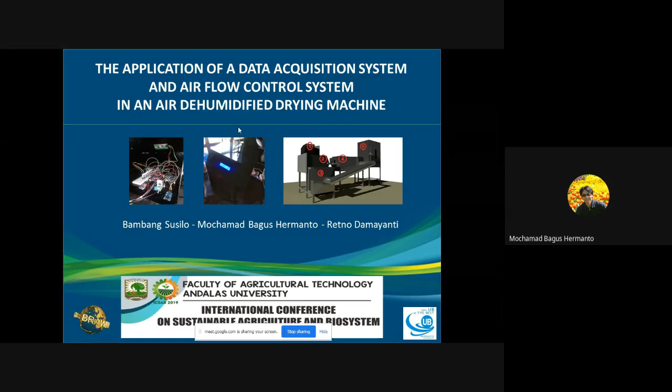I would like to present our article entitled "The Application of Data Acquisition System and Airflow Control System in an Air Dehumidified Drying Machine." I am Mochamad Bagus Hermanto.

The objective of this drying is to reduce grain respiration by removal of excess moisture, so we need to reduce the moisture content and prevent the qualitative deterioration of seeds in storage.

Because excess moisture can support the growth of microorganisms and activities of insects, a suitable design for seed drying system is an important step to produce high quality agricultural seed.

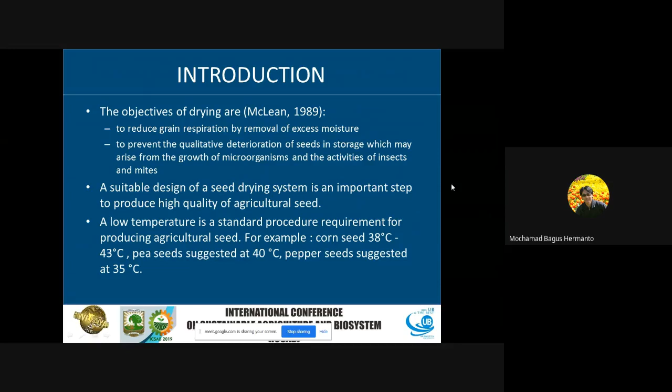For agricultural seed production, for example corn seed, they use 38 to 43 degrees Celsius for drying its seeds. For example, pepper is suggested at 35 degrees Celsius.

The previous research by Susilo et al. in 2020 did a research about the performance of drying machine with air dehumidifying process for sweet corn seed.

This method reduces the air moisture content so that the drying temperature for seed can be lowered with low relative humidity, so the drying rate will be accelerated.

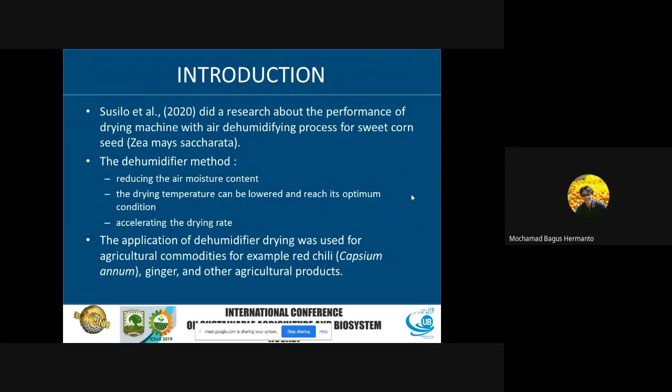Some problems that need to be solved from the previous research: first, the drying capacity of the machine was less than 1 kilogram. We want to increase the drying capacity by modifying the existing drying machine.

Also, the heat from the condenser is not yet utilized. The third problem is that a data acquisition system was needed to collect real-time temperature and humidity profiles during the drying process, and also an airflow control system for ensuring that the humidifying temperature was under the dew point temperature.

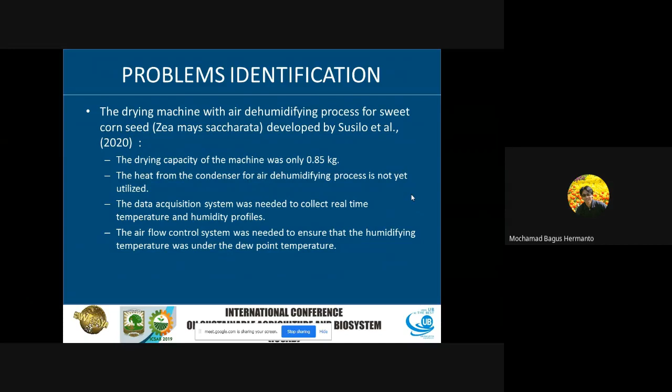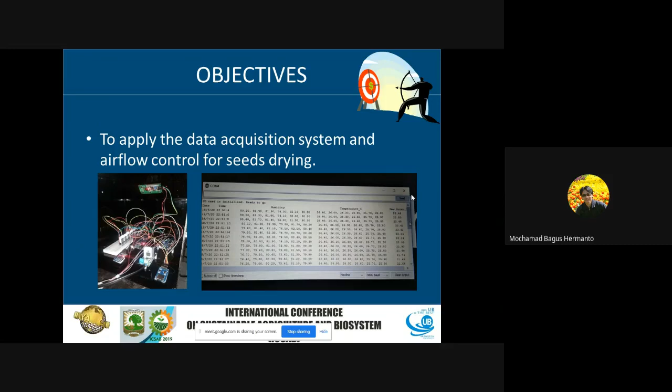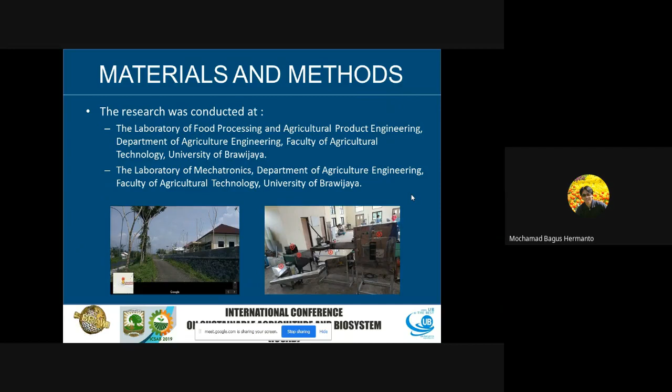So this research's objective is to apply the data acquisition system and airflow control for seed drying. This research was conducted at our laboratory in University of Brawijaya, the Laboratory of Mechatronics and Food Process and Agricultural Product Engineering.

The materials used for this research are the microcontroller, the Arduino Mega, and DHT22 sensors for temperature and humidity. Also a micro SD module for saving the temperature and humidity data into a micro SD card, and an LCD for monitoring the temperature and humidity, and software for programming the microcontroller.

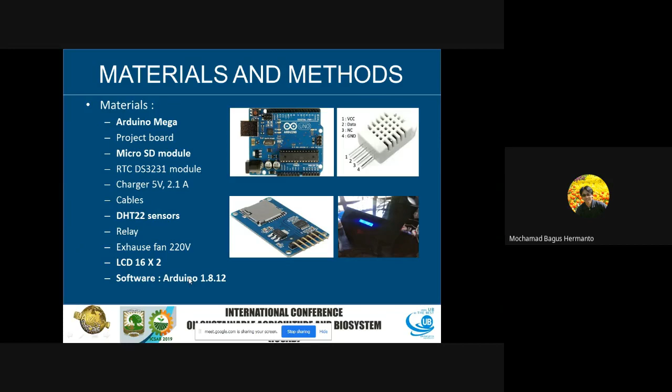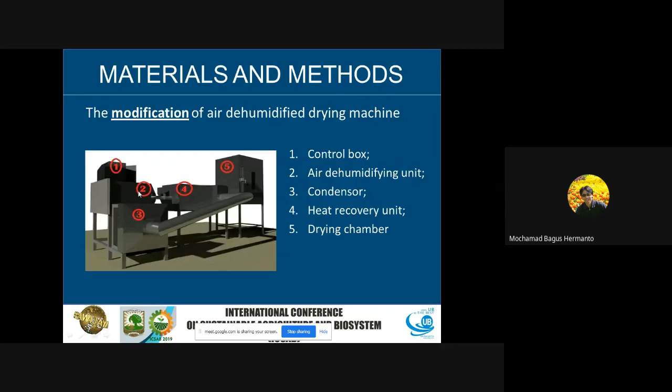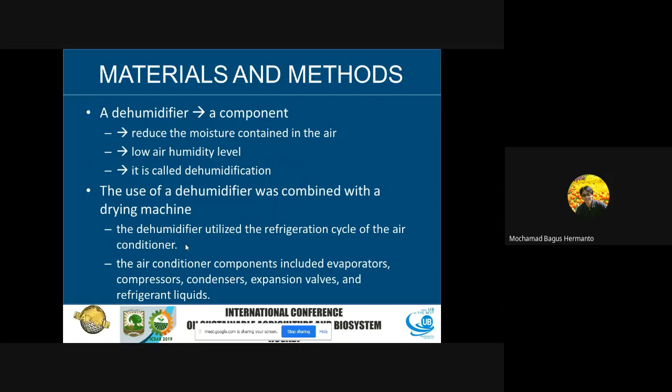The dehumidifier process is conducted at number 2, the air dehumidifying process. This uses the refrigeration cycle of an air conditioner, so we use an air conditioner here to make the air temperature drop and cause condensation, so the air vapor will be condensed at this dehumidifier unit.

The working principle is as mentioned before: low humidity air will make a difference in material vapor pressure, which increases the drying rate. So drying at low temperatures and low humidity, as expected for the seed drying requirement, was fulfilled.

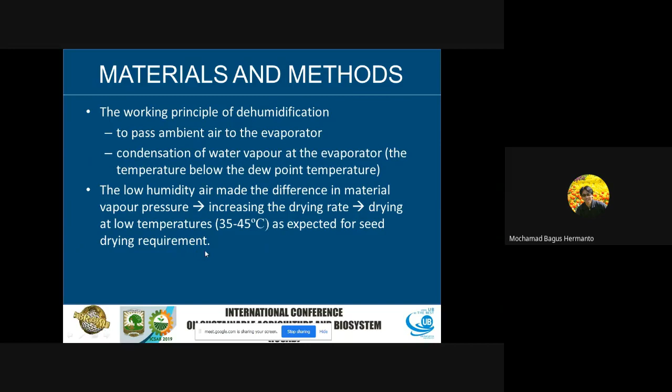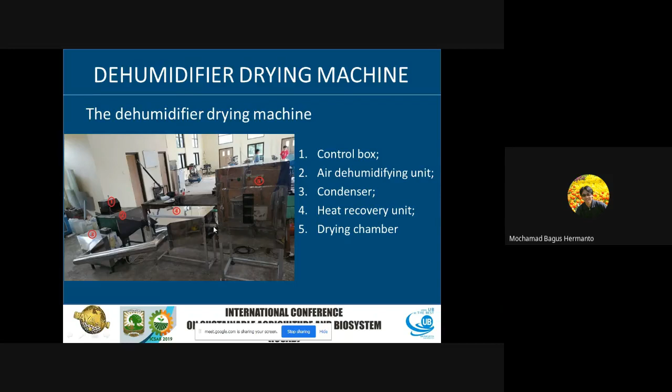This is the dehumidifier drying machine. We have 5 units here, and this is the data acquisition processing with six sensors. All sensors are placed with the first sensor in ambient to measure the ambient temperature and humidity.

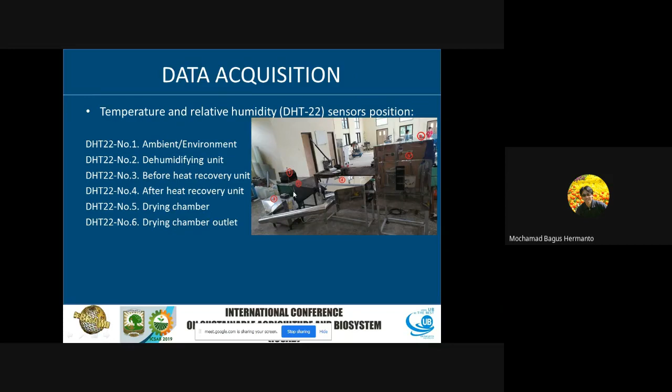Second sensor at the dehumidifying unit, before the recovery unit, after the recovery unit, drying chamber, and the outlet. All sensors are calibrated, and these equations are used in the Arduino Mega.

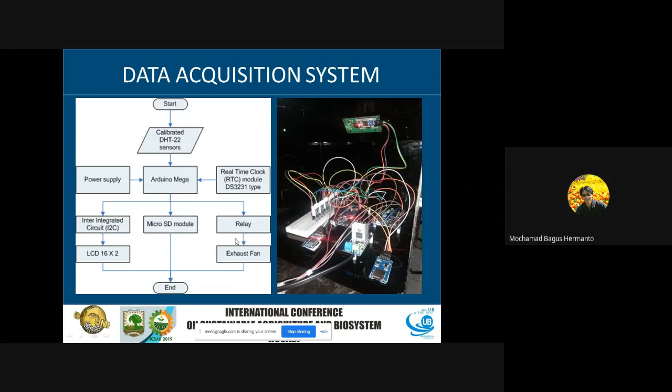So the data from the calibrated sensor can be seen at the monitoring system on the LCD, with 2 rows, and also can be saved in the micro SD card using the micro SD module, and also for controlling the airflow system here using a relay.

This uses an airflow control system. The control system cuts off the airflow if there is no condensation in the dehumidifier system. The working principle is: if the temperature in the dehumidifier chamber is less than the dew point temperature, the fan will turn on.

During the experiment, the fan turns on 20 minutes after the system started. In those first 20 minutes, the temperature in the dehumidifier chamber has not yet reached the dew point temperature, so the fan is off and there is no flow to the drying chamber.

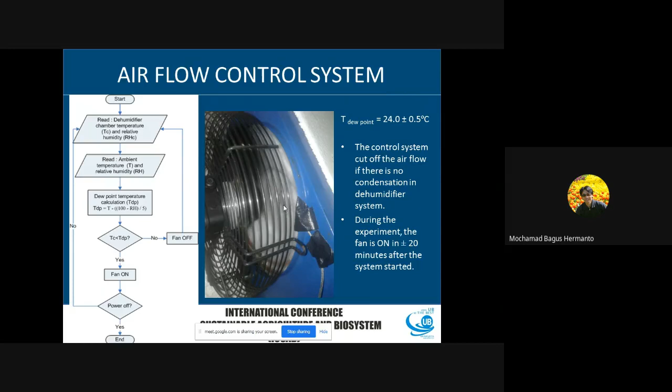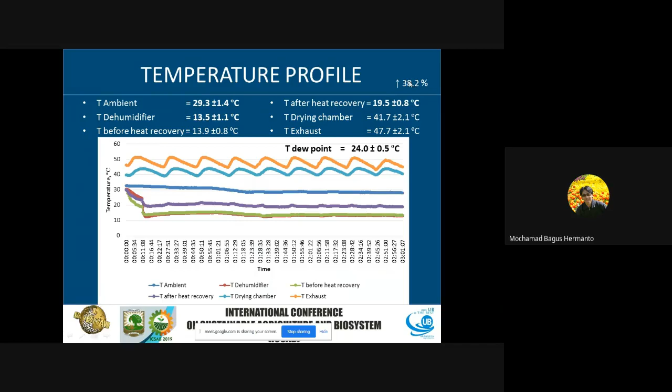From 13.5 to 19.5, we use dissipated heat from the condenser. And from 19.5 to the set point of about 41 degrees Celsius, we use an electric heater. This reduces the energy requirement from electricity, with a reduction of about 38.2%.

This is the relative humidity profile. We reduce the humidity from 74% ambient into 32% in the drying chamber, so lower relative humidity here will cause a faster drying rate.

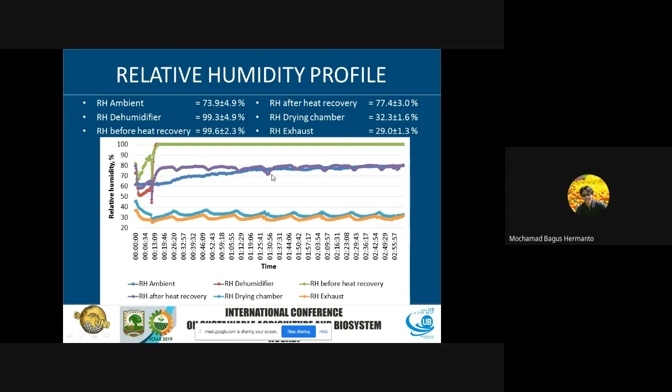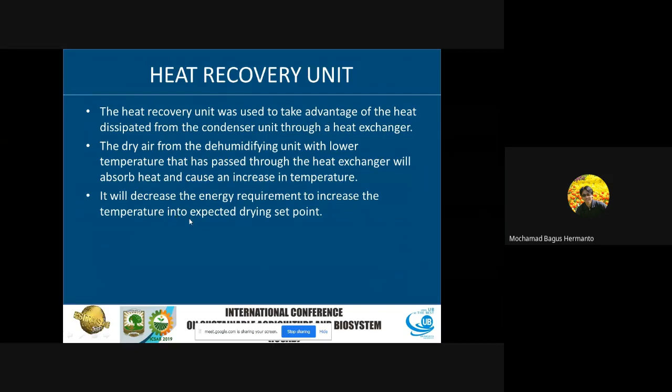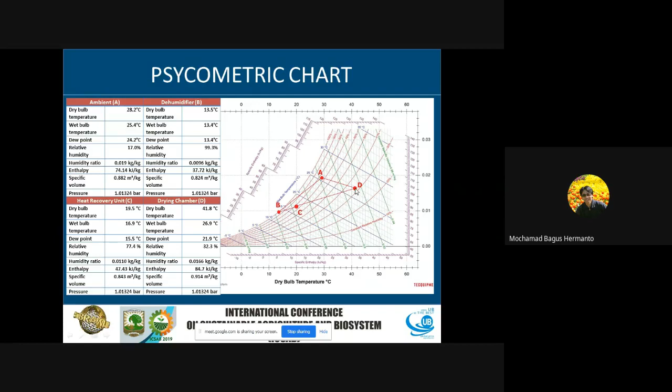This heat recovery unit is very important for decreasing the energy requirement to increase the temperature into the expected drying set point. From A, the ambient temperature, B is the dehumidifier, C is the heat recovery unit, D is the drying chamber. From B to C, we use heat dissipated from the condenser. From C to D, we use the electric heater.

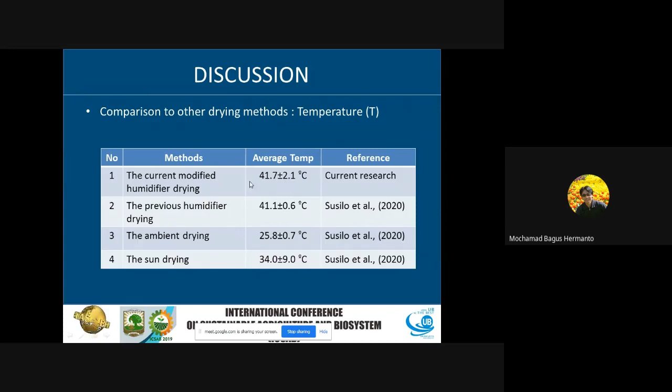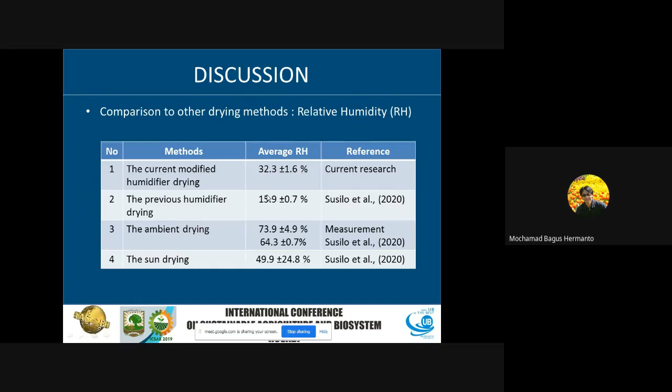This is a comparison between the other drying methods. This is almost the same as the previous research, and compared to ambient drying and sun drying, we have better results. This is also good because the previous result had a lower capacity, less than 1 kilogram per batch, while we have a larger capacity of about 5 kilograms per batch. So on average, we have good results here.

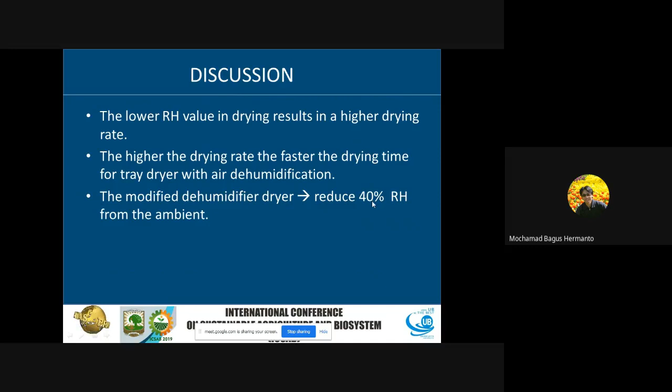From this modified dehumidifier drying machine, we reduce relative humidity by 40% from the ambient.

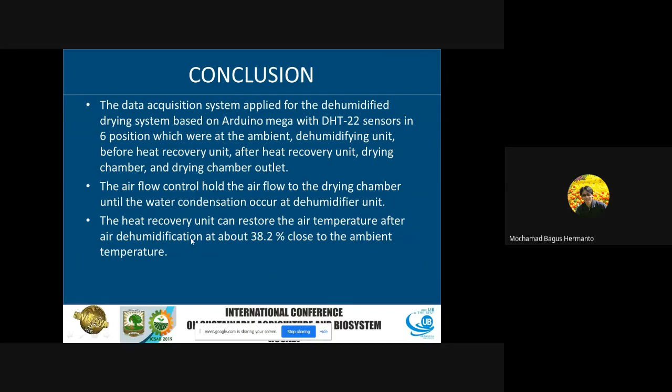This restoration is about 38% close to the ambient temperature. Thank you for your attention.